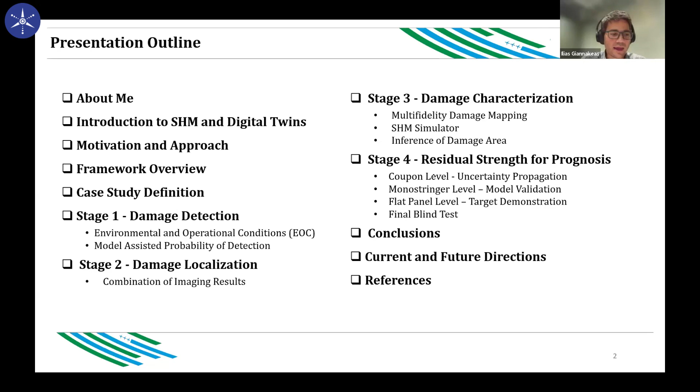A little bit about me - my PhD was on material modeling, specifically fracture mechanics in brittle materials, where I used peridynamics to simulate fracture. After my PhD, I joined the Structural Integrity and Health Monitoring Group at Imperial, led by Professor Aliabadi and Professor Sharif Khodaei, where I've been working on structural analysis, reliability analysis, and lately also machine learning and AI to assist with signal processing.

To kick things off, I'd like to make a brief introduction about what SHM and digital twins are, the basis of today's talk. Starting with structural health monitoring - it's a combination of sensors and data analytics to assess the integrity of a structure. We'll follow the SHM hierarchy a lot today, which starts with detection to see if there is damage, localization of the damage, and characterization of the damage to see how big the damage is. These first three steps define the diagnostics of SHM.

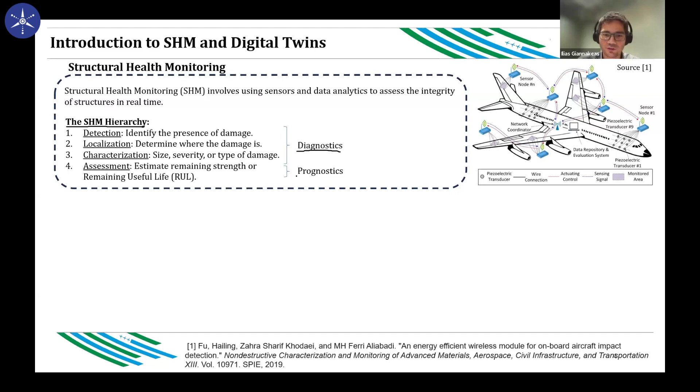In the past decade, the booming advancements in IoT and computational power have made digital twins possible. Digital twins are really a combination of a physical system, our actual structure with the sensing network, and a virtual system that contains all the models and analysis algorithms that are able to communicate with each other in a two-way approach, with information passing between both the physical and virtual systems.

This communication is taken care of by the communication and data management components. We also have a component for user interface, because at the final stage and top stage of digital twin, what we want is to support decision-making by the users and operators.

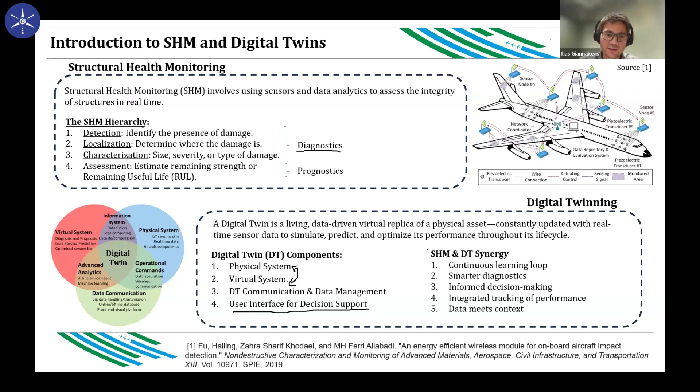In reality, structural health monitoring and digital twinning actually go hand in hand in order to enable continuous learning, provide all the necessary information to the system about its state, and really put some context behind the sensor estimations.

So the vision with this framework that combines SHM and digital twin is really to be able to achieve on-demand indications and assess in real time the integrity of the structure.

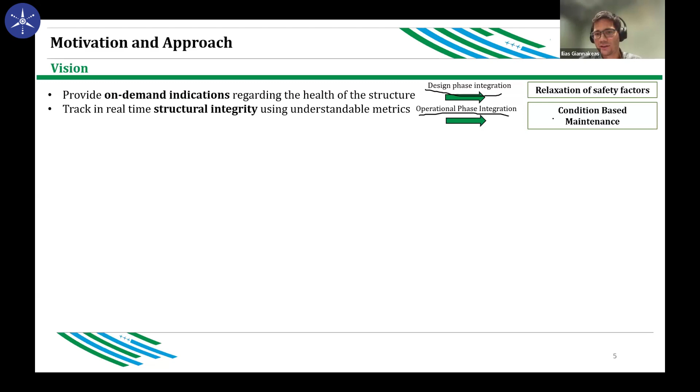If we achieve these things and integrate them in the design phase of the structure, we can actually relax safety factors, while during operation, we can avoid the current schedule-based maintenance and transition to a purely condition-based maintenance. So this is the vision behind all this research.

The aim of today's presentation is to really present a holistic framework that we try to use to valorize our data. So what we try to do is pretty much close the loop.

We start from our sensors, we extract our signals, we process our signals, we translate all the features and indications we have extracted into reliability estimates, and these reliability estimates actually assist the decision making.

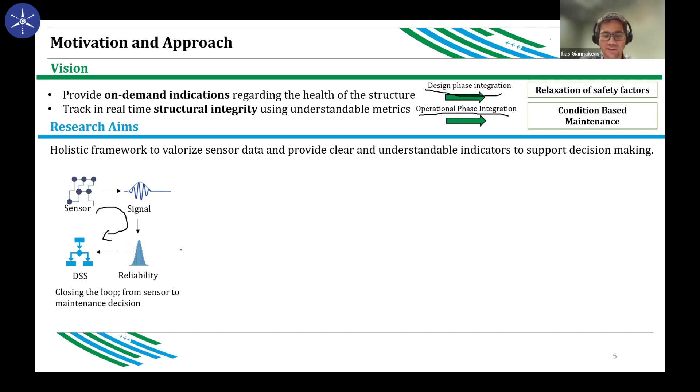Of course, there are challenges, and we will discuss them in more detail during the upcoming slides about how we address, for instance, environmental differences or data scarcity and uncertainty in our system.

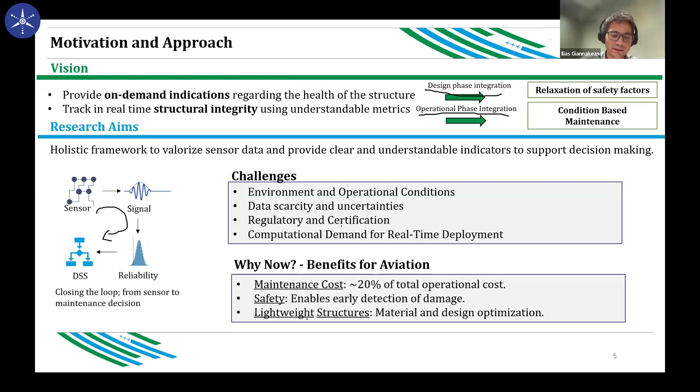But the most important thing is what benefits this is going to give us. The frameworks like this can be adapted to different industries, but for aviation specifically, we can reduce maintenance costs that account for almost 20% of total operating costs, improve safety by having early warning systems, and lead to lightweight structures that can assist with the green transition and really enhance the sustainability of aviation.

So how are we going to do this? What we are going to discuss today is pretty much having two building blocks that operate in parallel.

One building block is on the mechanical behavior of the structure and how we can start from simple structures and really propagate information as we go to progressively more complex structures and reach our target structure.

At the same time, we have in parallel investigations that try to quantify the response of the SHM system. These responses start again at the coupon level, and as we propagate through the building block, we push the information to the higher scales. This will give us a combined data set of a lot of experimental investigations.

That will be combined with our physics-based model in our analytical layer that can be used for prognostics and diagnostics, and eventually provide info about the reliability of the structure.

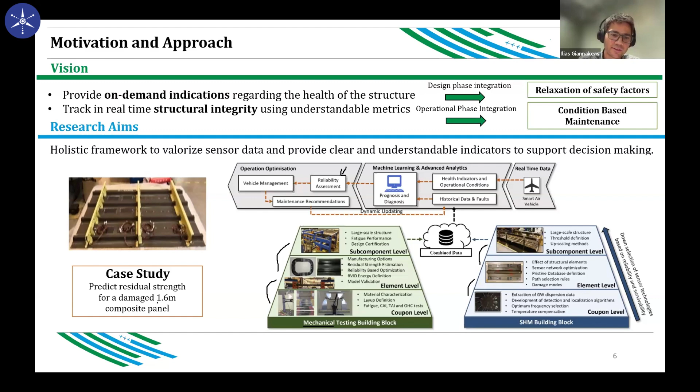This framework will be demonstrated for a case study, and that's it. It is for the reliability assessment of a composite flat panel that is approximately 1.6 meters long.

Now, a little bit about the framework we will be using. Let's say we have a physical system, in our case a composite structure that has an SHM system integrated and is able to collect data and store the data it is collecting.

Every time we operate a structure, the collected data will be passed on to the asset integrity assessment system. And this system contains four main modules.

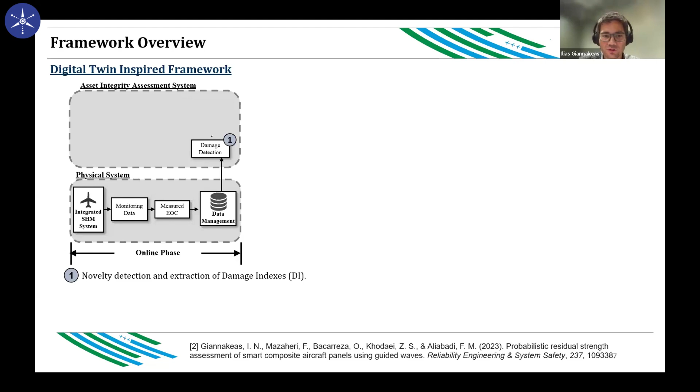The first module is the damage detection module that extracts damage indices and identifies anomalies in the structure. If an anomaly is detected, then we go to the damage localization module that informs us about the location of the damage. Then we can move to characterizing the defect in the third module and estimate its damage size.

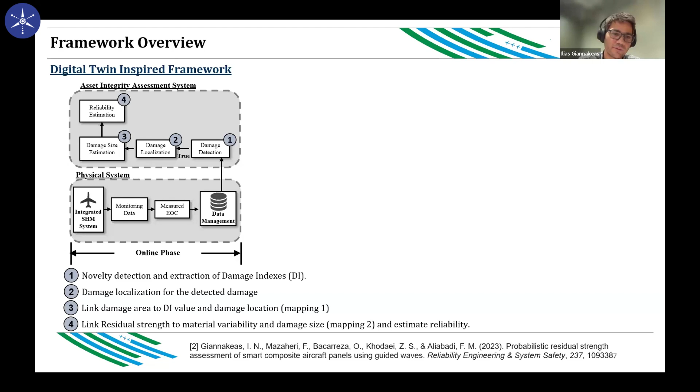And finally, if we have information about the location and size of the damage, we can go to the final, fourth module to do a reliability estimation. So we can go through the hierarchy of SHM till final reliability assessment that will drive maintenance decisions.

All of this will have to happen very rapidly in the online phase. In order to have a system like this, we need extensive preparatory work, like experimental and numerical models, and we will complete all of this in an offline period. This offline phase will include all the necessary steps to design and develop the system before its final deployment.

So we can start with some experimental campaigns following the building block from coupon to monostringer and to flat panels, increasing the complexity of the structure. The first thing we're going to do is collect measurements from both pristine and damaged specimens at different environmental and operational conditions. This will give us an extensive library of signals that we can process to extract compensation factors.

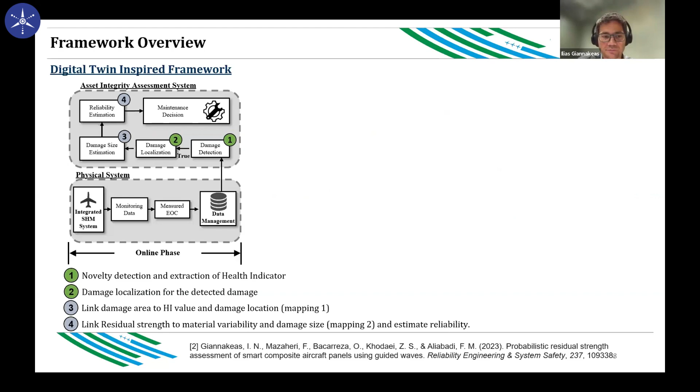For the next two modules, damage size estimation and reliability assessment, we have to follow a similar approach. First, we need to go to our experimental campaign and extract information about the structural behavior of our material and quantify uncertainties relating to material variability.

At the same time, we want to quantify any uncertainties with respect to the operation of the SHM system, for instance, how the system interacts with damage. In parallel, we developed two numerical models: a model for structural behavior—here, because we have composites, that's a compression after impact simulation—and a structural SHM model that simulates how waves propagate and interact with damage.

In order to estimate the damage size, we follow a fusion process, which we will describe later, to create a mapping that connects the readings from the sensing network with damage sizes. This will allow us to perform the third module, damage size estimation.

Now, once we know we have a damage, the location of the damage, and the severity of the damage, we can use calibrated models for residual strength of damaged composite panels that contain the uncertainty from the experimental investigations, and train some surrogate models that during deployment will operate very rapidly to give us a reliability assessment. Once we have this information, we will be able to advise about the maintenance action.

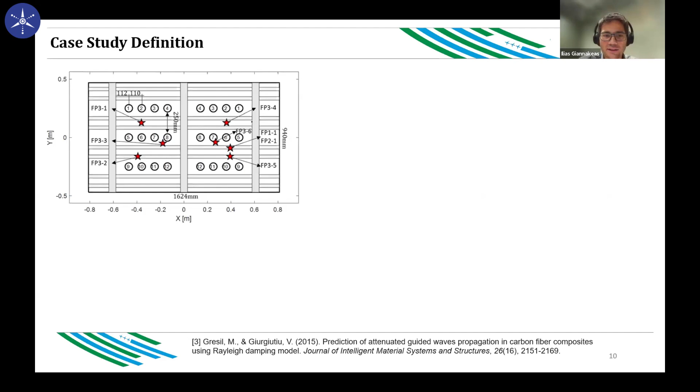Specifically, we will demonstrate the process for a composite flat panel. I had available three flat panels that were impacted at different locations, and we were able to collect various SHM information from those panels. All of them were made from the same material and were sensorized with piezoelectric transducers to induce guided waves.

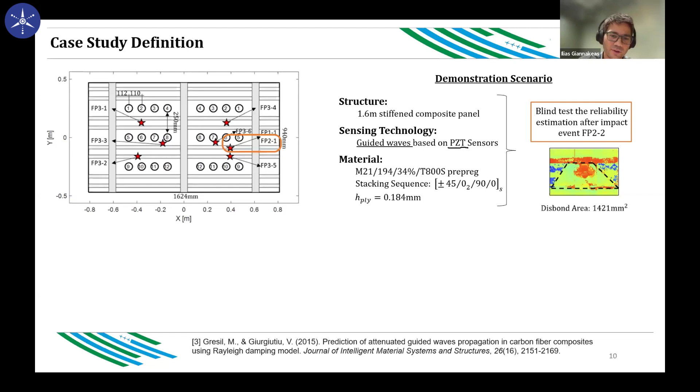However, I want to focus your attention on one panel that was impacted at this location only, at the foot of the stringer. This impact generated a disbond between the skin and the stringer. The whole idea of this framework is to blindly assess our capability to estimate the residual strength of the panel based on the SHM indications.

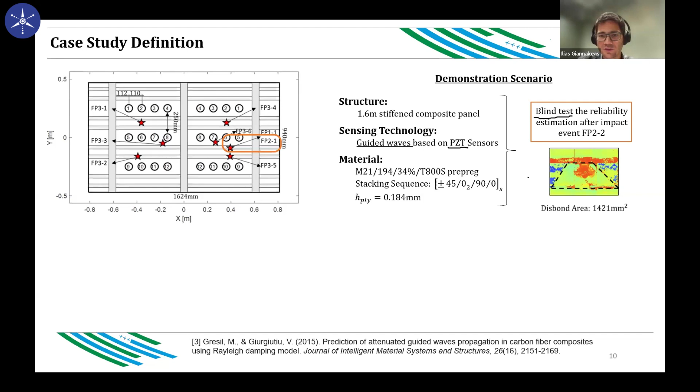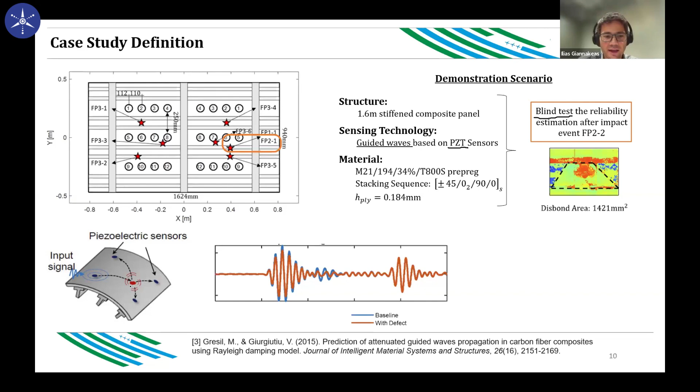So we will not use any other information other than that coming from the SHM models. Throughout this presentation, all SHM-related information comes from a network of piezoelectric transducers that excite a guided wave. As this guided wave propagates and interacts with damage, we quantify features based on the correlation coefficient, and to assess the existence of damage, we do anomaly detection with Mahalanobis distance.

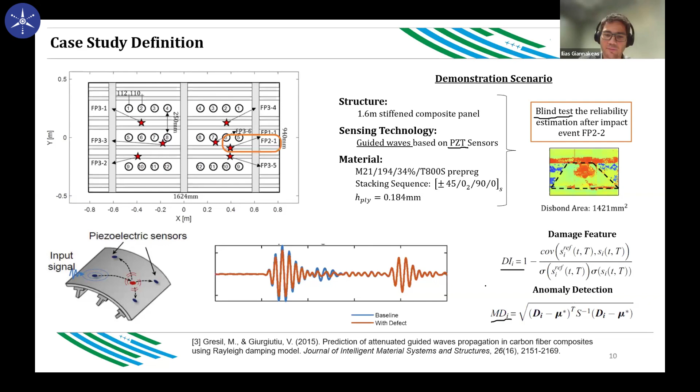Starting with the first stage, the first module, damage detection. The first challenge we need to overcome is to understand the different environmental and operational conditions and be able to account for them and compensate for them.

As expected, if we have a composite panel and we record signals from this sensor to this sensor, as the temperature changes, these signals are also affected. Here I have a plot of how the signals are affected for different measurements. We put this panel in an environmental chamber and changed its temperature from -50 to 70 degrees.

This is a reasonable operational range for aviation. The differences in the signals are so severe that they can easily mask the existence of a defect or create a lot of uncertainty about false positives.

In order to overcome this, we can compute through extensive experimental investigation compensation factors that alter the amplitude and phase of the signal, going from the original signals to a compensated state where the effect of temperature has been removed. This will improve our detection capabilities and reduce false positives.

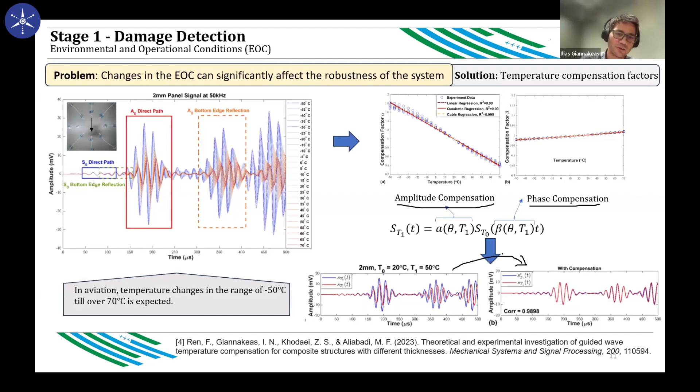However, quantification of these compensation factors requires a lot of experiments. The biggest question we need to answer is how feasible it is to collect these datasets, because as the structural complexity of our components increases, the feasibility of doing experimental campaigns is reduced.

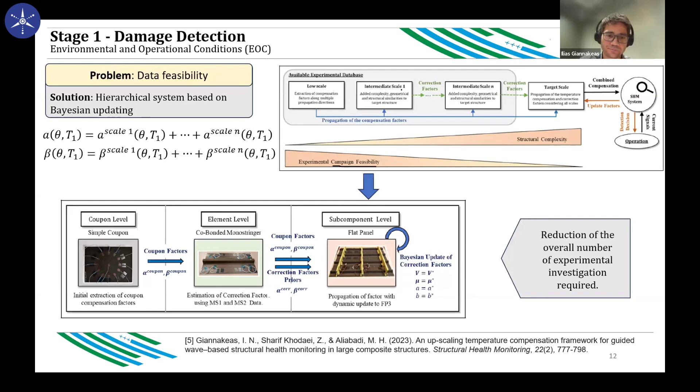This means we cannot take a big aircraft and try to get hundreds and hundreds of data recordings from it. So the idea I implemented here is to follow the building block approach, going from simple structures to structures with increasing complexity, and at each scale, correct and add additional correction factors that aim to improve the temperature compensation.

I've plotted an example here. These are signals collected from the flat panel along this sensor pair. Our aim is to go from this red line, collected at 35 degrees, to this blue line, collected at 25 degrees, and try to remove the effect of temperature.

If I only have compensation factors from the coupon level applied directly to the flat panel level, we get this dotted line. It's close to the blue signal, but there's still room for improvement.

If we add additional terms collected from further experimental investigation at higher levels, we can further improve our compensation and reach a better agreement between our compensated line and the true signal.

We can observe this improvement in this error plot at different temperatures. Going from no compensation at all, to having compensation from coupons, to monostringers, to the target structure directly, we can progressively reduce our error.

This error reduction is actually a huge improvement for our detection capabilities. This process is able to reduce how many experiments we need at the big and final target scales, where it's difficult to get many experimental investigations, by adding more and more information from the lower levels and propagating them to the target level.

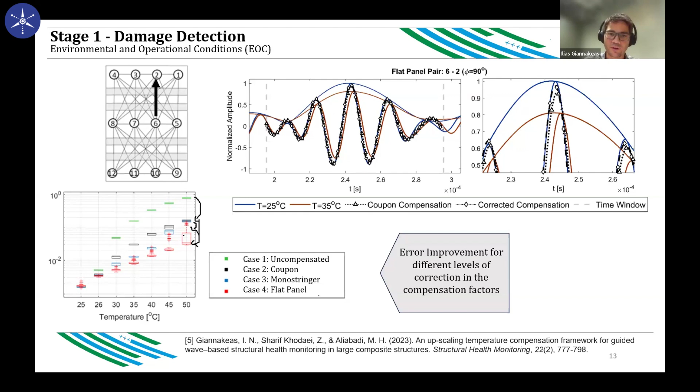Now that we have a way of accounting for environmental and operational conditions, we need to quantify the performance of our structure and really certify it. The aim here is to quantify the probability of detection.

The way we can do this is either by following very strict experimental frameworks described in the literature, but because these require many experimental repetitions, another way to think of the problem is to leverage physics-based simulations to assist in our detection, in the computation of the probability of detection.

The model I've used here is a simple model of a composite panel where we can generate and propagate guided waves. At the damage location, we can locally degrade the material parameters through the introduction of fiber damage and matrix damage parameters. By degrading these material properties, we can simulate the interaction of propagating waves with actual damage.

The idea is to use some experimental investigations we've done to calibrate our model, and then use this model to generate more and more damage scenarios.

Here we see again the problem of data scarcity. It's not always possible to get very extensive experimental campaigns, or hundreds and hundreds of damage scenarios at different locations to characterize your system. So we can leverage our physics-based simulations to aid us in this activity.

The way we do this is by training a digital clone that will replace experimental campaigns by calibrating our material parameters and finding the combination of material parameters that locally degrade the stiffness of the composite panel in a way that captures all the uncertainties we see in the experiment.

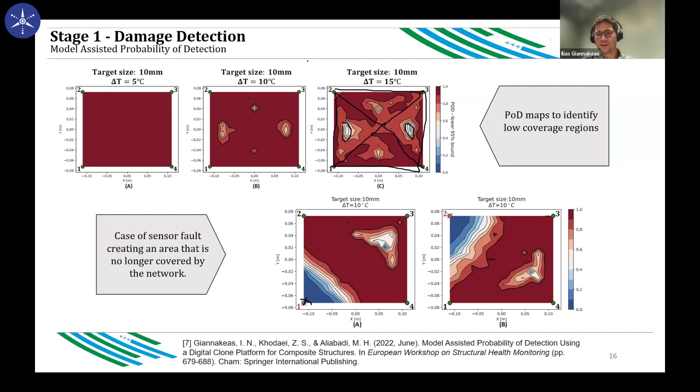So putting it all together, we have a way of addressing temperature differences. We have shown that we have a robust system. We are ready to put it into action and try to detect damage into our flat panel.

So now that we have detected the damage, the next step is to localize it. Using the same features and the same signals, we found that the best results were able to be identified by combining two very common imaging algorithms, the delay and sum algorithm with the RAPID algorithm. When we combine these two, we are able to get very good estimations about the location of the damage, and this algorithm gives us heat maps that provide a visual indication about where damage is.

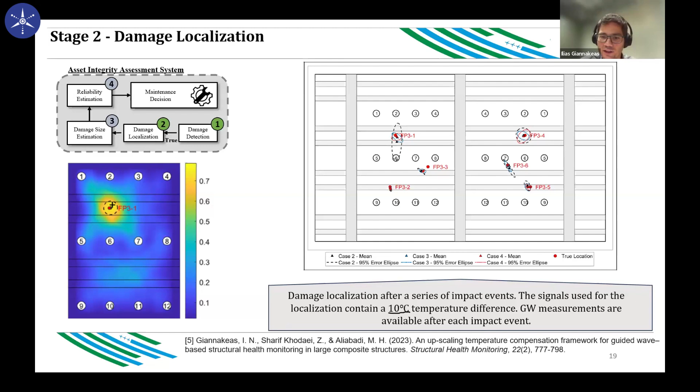So we have detected the damage, we have localized the damage. The next stage is to characterize the damage and assess its size.

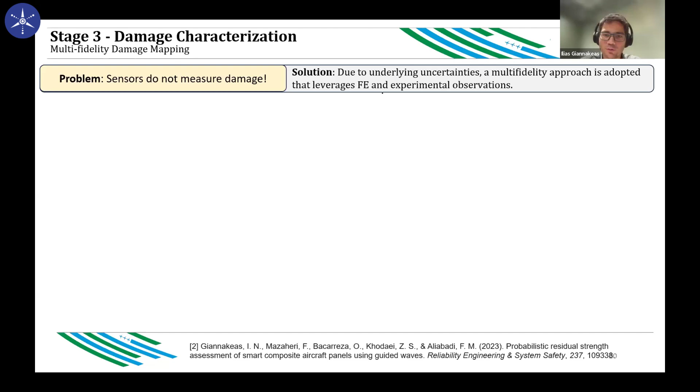But we have to be careful because the sensors we are using in SHM cannot measure damage directly. All these measurements are actually indirect measurements. We extract some features and try to correlate these features with specific damage scenarios. So we want to be able to capture all the underlying uncertainties in this mapping between the damage feature and the damage size. The way I have developed this module is to leverage a multi-fidelity approach, using both numerical and experimental observations to improve our accuracy in the predictions.

So essentially, we can write down our relationship that connects a damage area and a damage location, that's our input vector X, with the damage features we are getting from the damage indices.

This relationship can be divided into 3 terms. The first term is a low fidelity term that is trained using numerical data only, and we call this low fidelity because the numerics have some physics that are not captured perfectly compared to a real experiment. Next, we have a discrepancy term that tries to capture all the uncertainties and the discrepancy between experimental observation and numerical system. Finally, we have some measurement noise from the monitoring system.

Essentially, if we manage to come up with a relationship like this, we can try to answer the following question: if we get a damage feature from our first module, the damage detection module, along with an estimate on the location of the damage, can we infer what would be the damage area that would explain these two indications? The way we can do this is by casting this problem into a Bayesian formulation and trying to identify a distribution for the damage area parameter that would explain our observations from the SHM system.

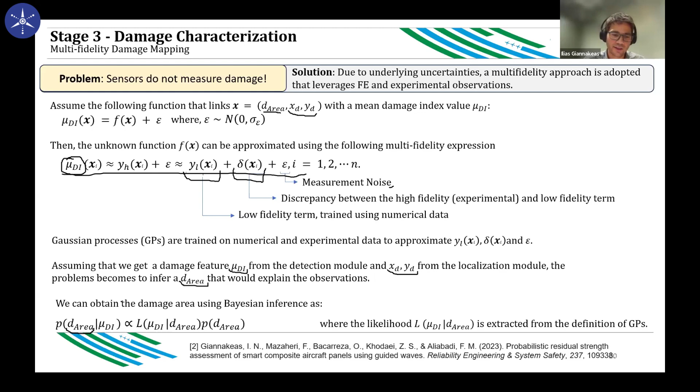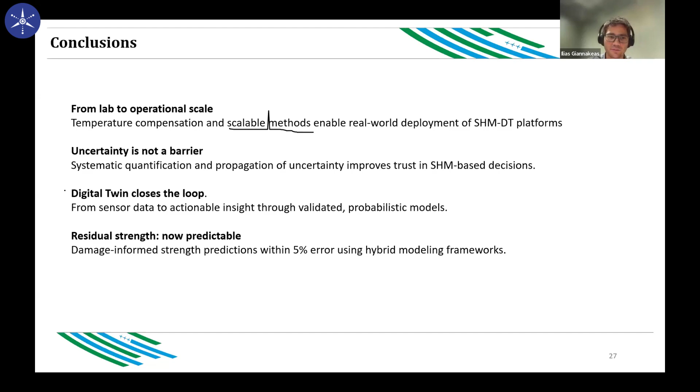So a little bit about current activities and future directions. Currently, we are working on a Horizon project called Avatar, where the idea is to extend this framework and the research I've been developing, in order to not only assess if there is damage, but really provide a holistic solution, including sensor technologies, data acquisition technologies, processing and visualization interfaces that will inform in real time the user about the state of the structure. We are working on a composite drone and a metallic aircraft.

An additional layer to the modules we discussed today, we are aiming to develop, is the capability to monitor the time history of the structure and extract specific information on how the structure has been loaded.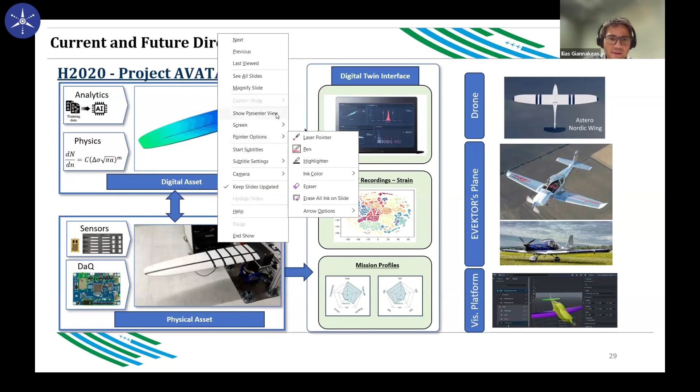These are supposed to be some animations showing the wing vibrating, and at the same time our digital twin is able to reproduce this vibration. The idea is that with wireless data acquisition and sensor systems, we can predict stresses at specific hotspots that will be used to drive, for instance, crack propagation activities.

And assess remaining useful life. Thank you very much for your attention, and I'm open to any questions.

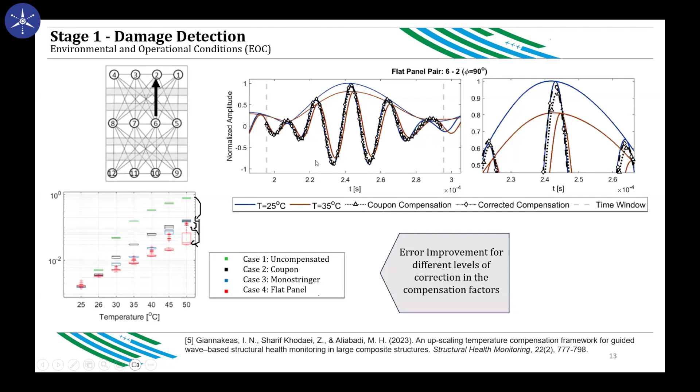The first question was about the flow process you showed earlier, going from damage detection to localization and then size estimation. It seems for you guys location is more important than the actual size of the damage, whereas in other applications size might have higher priority, because if the damage is big or small enough the location becomes secondary. So is this a cascaded priority, or do localization and size estimation have equal priority?

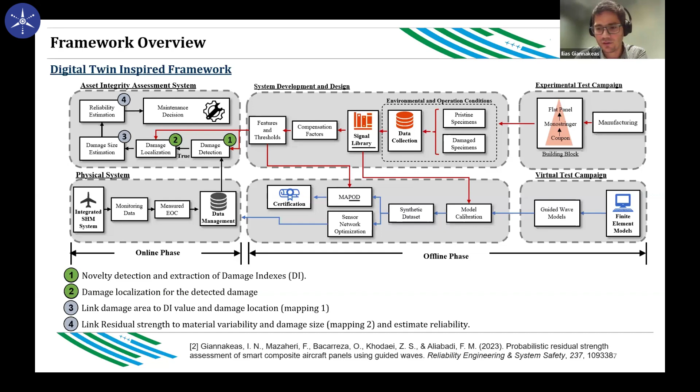I would say it's application specific. For instance, in a structure with a stress concentrator where you know the crack will initiate from that point, you pretty much already know the location of the damage, so localization doesn't have that much effect on your estimations.

But to jump ahead a bit, since this will help explain why localization before damage size matters for our application: I'll have damage at the interface between the skin and the stringer. A damage at one location and a damage at another location will provide different signatures. So in order to later use my multi-fidelity model to capture the extent of the damage, I first need to know where the damage is in order to search for those signatures. That's why it's important to identify location first and then size, because location becomes an input for the damage size estimation.

If I knew, for instance, that there's a bolt at a certain location and expected delamination to initiate there, I could skip the localization step entirely and go directly to damage sizing. So here, we didn't simulate damage only at one location — we simulated damages at myriad possible locations with different shapes and sizes, and then did our estimation.

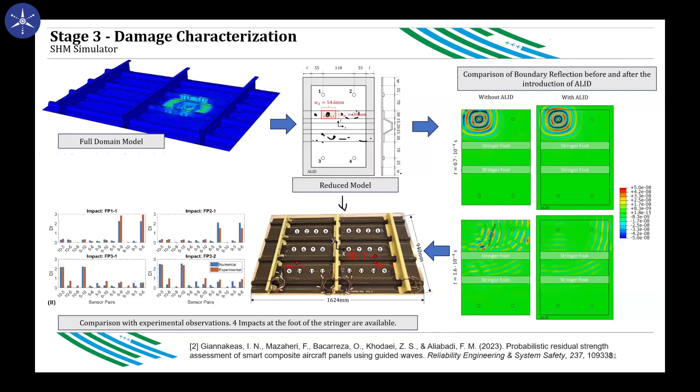Our reliability will actually depend a lot on the operational conditions, in our case because it's for aviation. So if I assume perfect conditions, we will be able to detect damages down to 4 millimeters in radius for a plate with this setup.

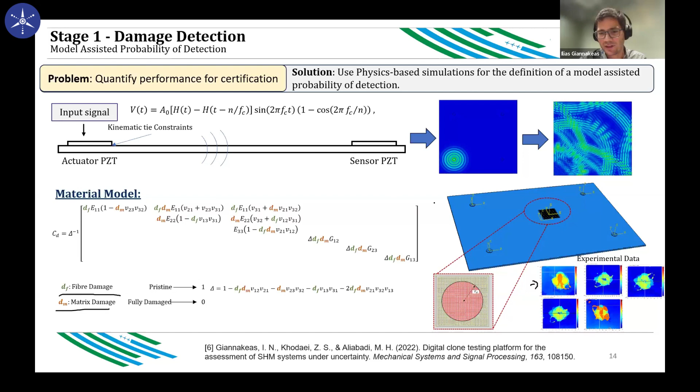For the sensors, I don't have the distances here. This is approximately 300 by 500, I think, the dimensions of this plate. Obviously, the sensitivity will change as you go to more complicated structures like this flat panel.

But what we have observed here is that you have to first identify what is your critical damage. So for instance, for us, a damage on the skin over here or over here does not really degrade the strength of the structure, while a damage on the interface has a very pronounced effect. This is why I use this as a case study to be able to predict it.

And our prediction capability for that, I don't have it exactly, but I would say the estimation was something like 100 to 200 millimeters squared - an area of, I don't know, 10 by 10 or 10 by 20, something like that would be the minimum detectable damage size.

Okay, so this is in relationship to mostly hardware related questions. If we move on to the kind of software related questions, I have three, but I will be very short, just to give time for everybody else to ask questions. I will probably start from the bottom.

Now, I did look into surrogate models for different applications back when AI started to make a splash on the scientific community. Now AI is 10 years old, more or less. But the main question is, usually whenever you rely on a surrogate model, you are running the risk of accumulating error, right?

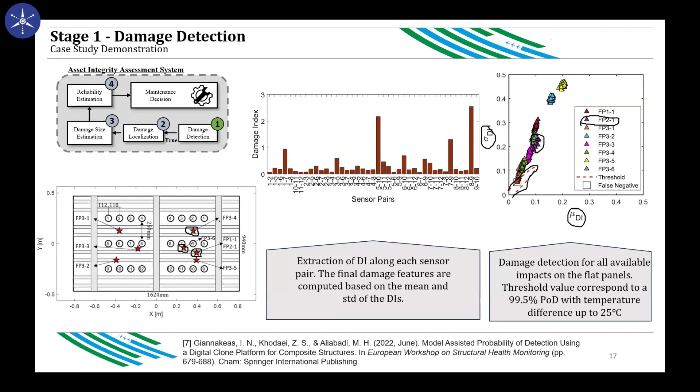When I put my question, I did put it before you had a slide where you were showing the experimental outcome and the simulations with that kind of standard deviation between them. So is this an experimental versus simulations comparison? Is that what you mean by the mean numerical?

Yeah. And so if your simulator is as good as the experiment, within the margin of error, why are you building another surrogate on top of that simulation?

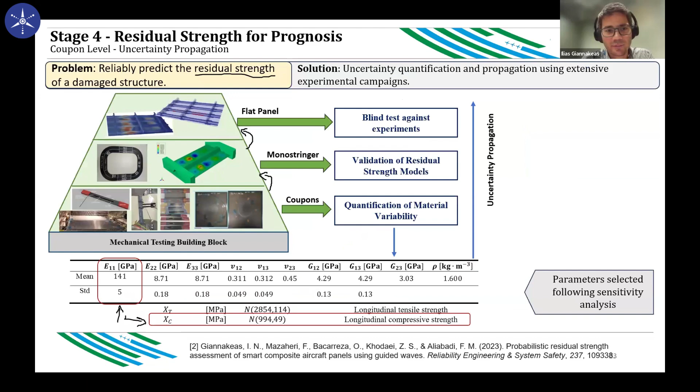Because it comes down to computational cost. In the end, in the process, when you operate a system like this, you need to be able to do the complete assessment in a matter of, I don't know, maybe minutes or something like that. You don't want to tell the operator, okay, wait a couple of days to run my simulations.

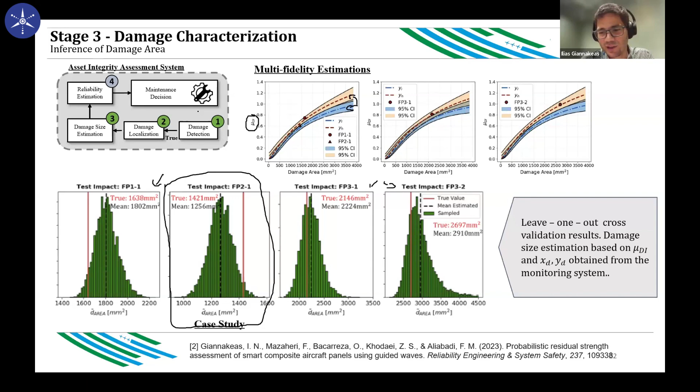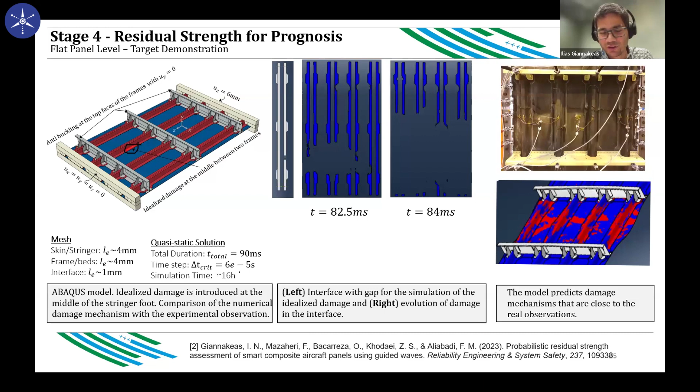For this scale, I understand it would be feasible, but each simulation at this scale was about 16 hours, each simulation. And we tried our best - I tried my best using the Imperial supercomputer to reduce it as much as I could.

So let's say we're at this stage: we have a probability distribution of my damage size, and I want to sample this probability distribution and run simulations. You have a sample coming from your damage size, and you have another unknown, which is your material parameters. So you would need to sample this many times in order to be able to understand.

Yeah, and usually the simulation time is also a prohibitive measure. But really, I would be cautious about that, specifically when it comes to industry - your surrogate model will suffer from accuracy deterioration. So maybe, I don't know if you have a plot here to compare the outcome from a surrogate model on a data set not used for training, if you're using deep neural networks or other means, in comparison to a native simulation - how does that compare?

Yes, so in reality, I have it over here. I'm using Gaussian processes specifically. If I had a model that I could run in, let's say, a reasonable amount of time, I would not use any surrogate - I would use the model directly.

Here we have the comparison. The blue lines are the outputs from the surrogate. The black crosses are the real estimations that were not used during training. So this is the comparison between the surrogate and the direct simulation of the structure.

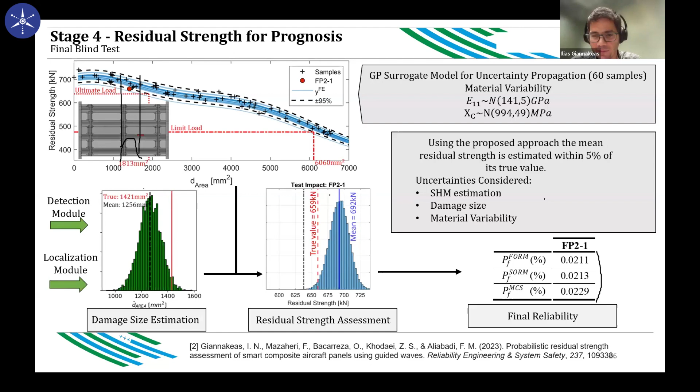I see, it's a little bit different, the setting, because the damage I'm considering stems not exactly from operation, but also from use. For instance, this is damage created because of an impact, an external impact, and not due to the stresses developed during operation. But what you are discussing, yes, it is something we are doing currently in the current project I mentioned, where we are recreating stresses and strains at specific hotspots where we know damage will initiate, and trying to capture both the initiation phase and the crack propagation phase, to characterize the full life cycle of the operation of the structure. I don't know if this answers your question.

Yes, thank you, this is clear now. You also mentioned the printed sensors. So how would they be different from your off-the-shelf ones? How would that be important for your future work?

In general, the capability of having automation is important for SHM because it can reduce a lot the integration cost. Imagine you have a flexible layer, a piece of material that you can put on your structure, just stick it on it, and start collecting data. That's the holy grail, instead of going there, trying to put sensors, put cabling, and so on. If you are able to print the sensors, we are already able to print tracks, conductive tracks. If we are able to print the sensors as well, this will give us the flexibility to create very lightweight systems, avoid as much as possible using cables, and contribute a lot to keeping the structure as lightweight as possible.